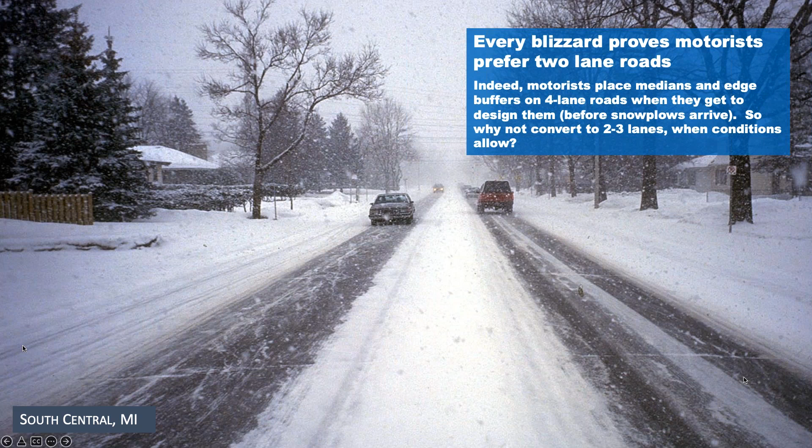I'd like to get right into the presentation. I tend to be a visual person. Whether or not you think you have a road diet, if you have a multi-lane road in the winter, you've got a road diet. It's amazing how gifted motorists are at figuring out they don't want to be close to another motorist coming the opposing direction, and they'd prefer not to be next to the curb or the trees. So they just naturally create a road diet every blizzard. It's something worth thinking about as designers, that motorists have preferences, especially when the weather becomes inclement.

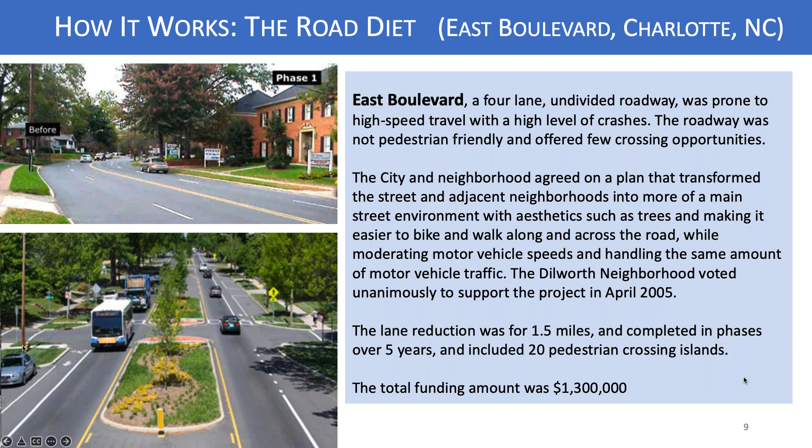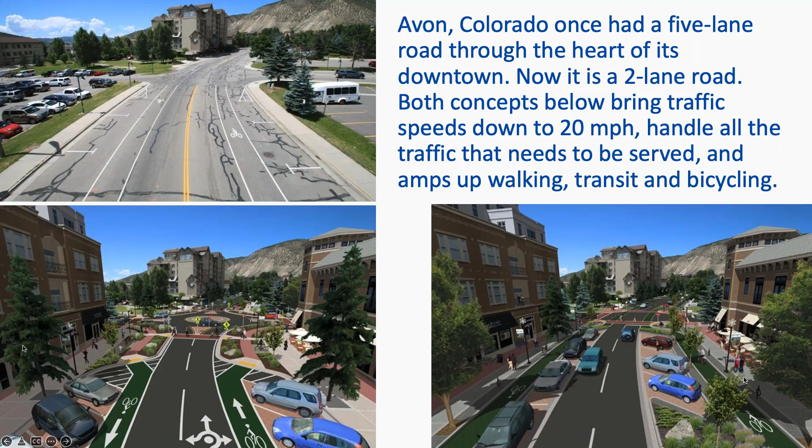I want to use the second name for a road diet in this presentation, which is repurposing a street, to broaden what this presentation is about. It's not just taking out lanes, it's coming up with better overall dimensions for a street to reduce visual ugliness and make it into a beautiful place. Victor Dover and Ken Garcia worked on that project, and it's completed—a beautiful repurposed street. Again, I want to broaden the term road diet for this presentation today.

Another well-studied project is the Edgewater Drive project in Orlando, in a little community called College Park. It was to be a resurfacing project, and the community wanted to do a road diet. The Florida DOT said if you take over the street and it becomes your street, then you can do that—we'll give you permission. There was a lot of discussion about this, but it was very successful and very well studied. We'll show some of the results later in this presentation.

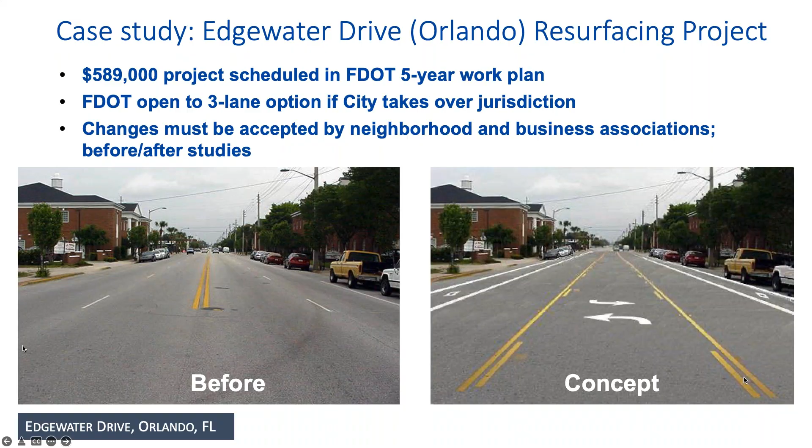This brings us to why road diets. The Federal Highway Administration has this beautiful explanation: the primary benefit is to improve safety, and it's significant how much safety gain there is. We'll get into that in detail. But there are many other benefits, so we're going to cover economic, lifestyle, and multimodal aspects. There are so many reasons now to look at taking what were once fat and unsafe roads and making them safe again. So that's kind of an outline of today's topic.

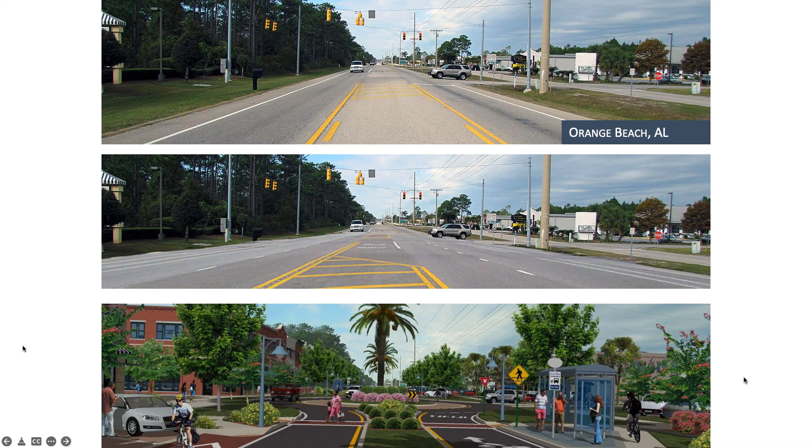And then I said, well, look, you don't have to have this. And so I had my photomorph specialist, Todd Clemens, create a really authentic rendition of what it would be, because roundabouts will carry 30 to 50% more traffic. They could handle the additional load during a hurricane relief.

Lake Oswego is just one of the most dynamic places in Oregon now, as a result of their principal road now being very green. I think it's also important to point out that when we're looking at streets, we should be looking at what is the purpose of the street. What is this node, this entire greater area, what does it want to become? And that should be what drives our decision-making tool.

One of my ultimate favorites for a roundabout, and it's very well known today, we were looking at La Jolla Boulevard, which was 5 lanes, and speeds were excessive. They were way high, but it had a very high traffic number, 22,000 vehicles per day. So we really had to do our math and make sure that it would work. We found out it would with single lane roundabouts, and we'll get into detail.

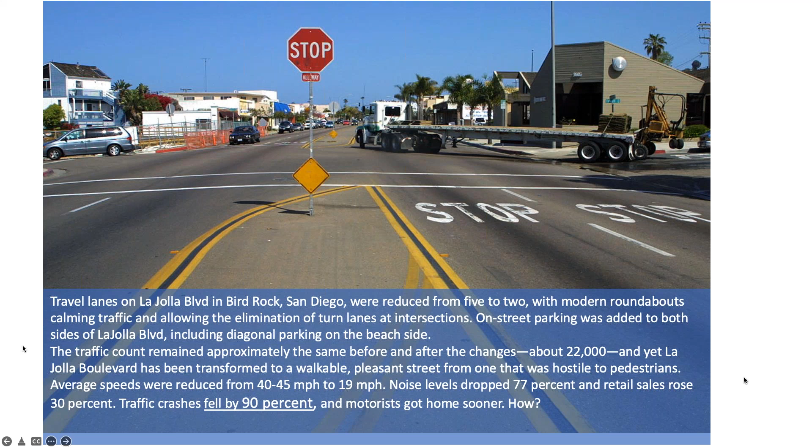So here's the road before. I believe they had 6 or 7 signals and then a couple 4-way stops along the corridor. I'll show you the morph here. In this case, this is an actual, well, it's not a morph, it's the final.

Notice we were able to get angled parking in on one side of the street, so we added more parking and parallel parking. The speeds now are down to 19 miles per hour as opposed to 35 and even up to 45. And here's the cool thing, because we took out all the stops, the motorists are getting home sooner. And so at a much lower, much safer, much more retail friendly and people friendly, this is really working.

Again, a different section of La Jolla Boulevard, you can see what it was and then what it became. Huge number of people now ride this for pleasure as bicyclists. Far more people are now coming down for businesses.

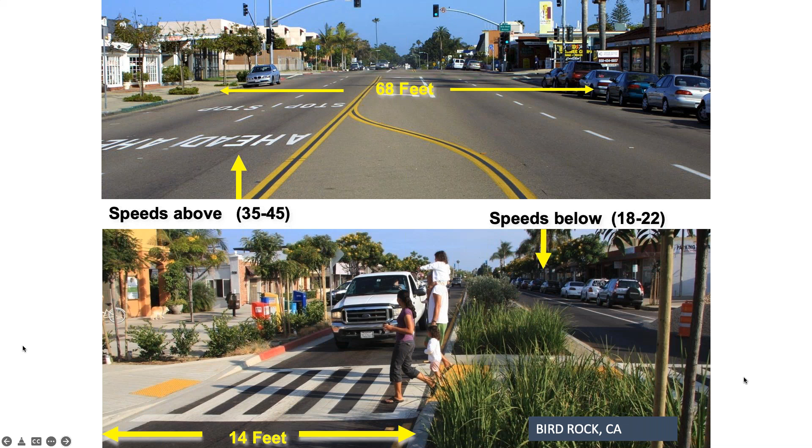You can see the difference in dimensions. It used to be 68 feet curb to curb, now the pedestrian only has to cross 14 feet at a time. The motorists yield because of driving so slow. And so the pedestrians are not slowing down the motors just to get across the street, which they would have had to do with the signal set up, even if there were no motors waiting to get on the street. It was the pedestrians that were calling in the signals that would pause.

And now new businesses are settling in, including some pretty high scale businesses like the Long's Pharmacy. The owner said they would not have come here without the road diet and the roundabout.

So the litmus test I think we should be using when you consider a road diet is: will the change you're going to make add to carrying out the value of your community and reward that short trip and promote active transportation? That's exactly what La Jolla Boulevard did.

Then another one, this one in Albert Lea, a Blue Zone community. Look up Blue Zone in your spare time and see what the organization is all about. But the state of Minnesota did not want to do a road diet, and the community was really together. And they said, no, then just go somewhere else and repave your road. We don't want it to be made the same. Well, in the end, Minnesota said, okay, we'll do it. They did, and there was a 73% reduction in crashes.

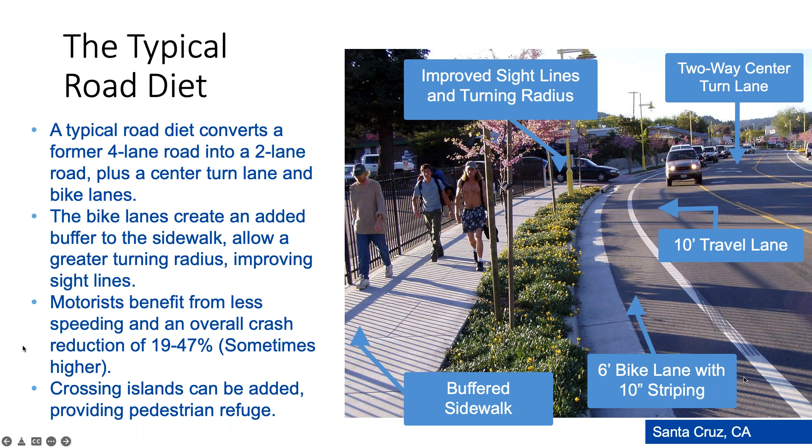So what are the details? When we do a diet, this was formerly 4 lanes. Now notice we've got a wider buffer to the pedestrian, so we're improving walking. We now have an edge with the bike lane, so we've got more turning radius for motorists to get in and out of the street, and improved sight lines. My recommendation is to go down to 10-foot lanes and give yourself more space for the bike lanes or whatever other features you're wishing to add.

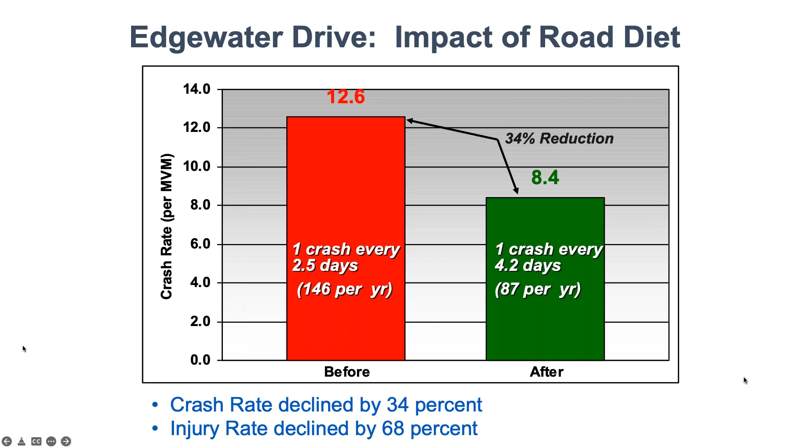So what are the results? This has been very well documented. I mentioned that Edgewater Drive has been very well studied. I'll go through each of these: the crash rate declined 34%, and the injury rate declined 68%. I think we should be looking at our crash reductions, not just the raw number, but how much injuries go down, and record that with your road diet when you create one.

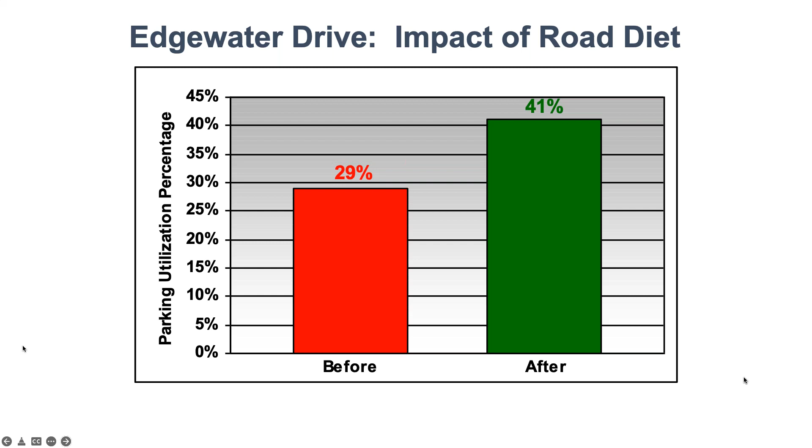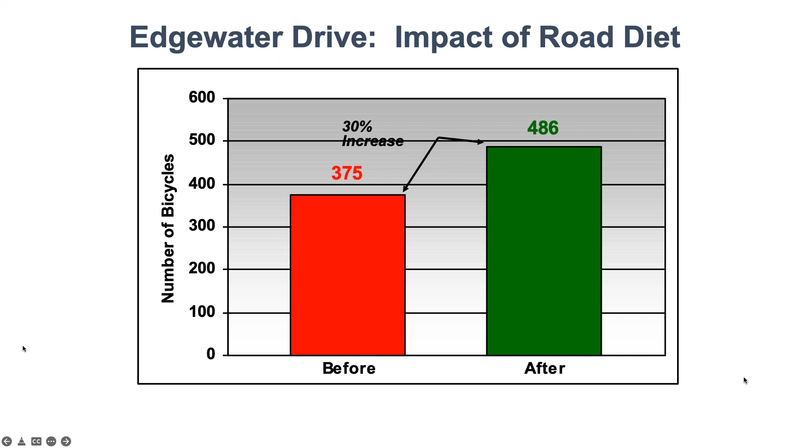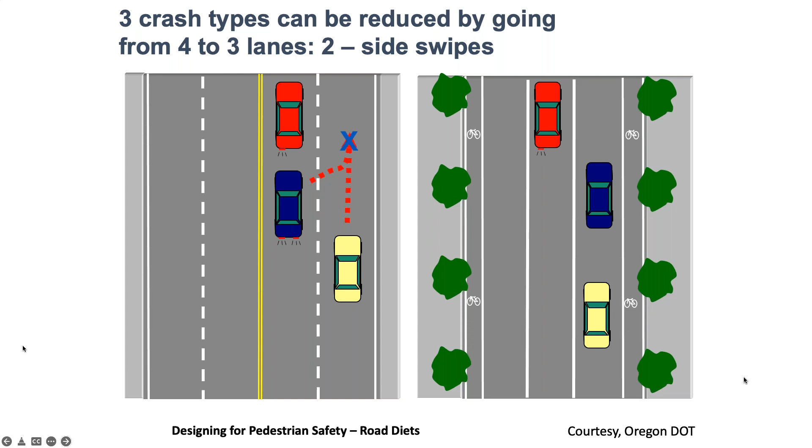Now, why? Well, on a 4-lane road, a motorist who's going to turn left and is slowing down is a high candidate for a rear end crash. In fact, that's the highest number of crashes on a 4-lane. This is what motorists have to do when that occurs—notice the motorist in the blue car is now in conflict with the motorist in the yellow car. Likewise, if the motorist is turning left, the motorist in the red car on the right creates a screen so that the motorist making that left may not see. This is a horrible type of crash, and it cannot occur when you have a road diet.

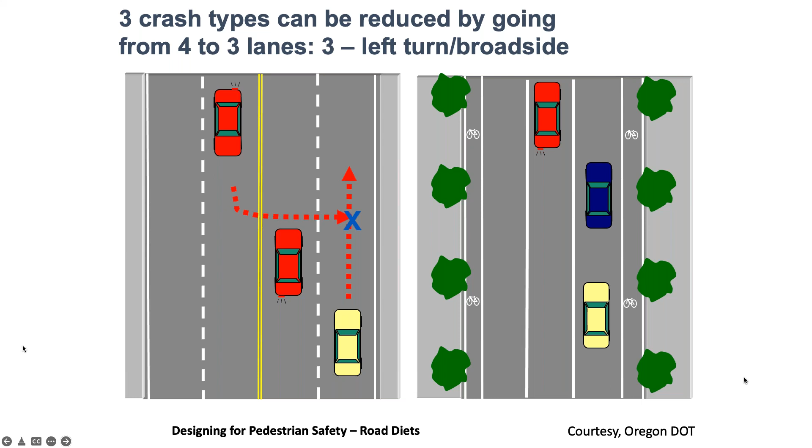Let's talk a little bit about the capacity issue. The interesting thing is Kirkland, Washington, which back then had 3 road diets already in a fairly small town—they realized they had problems with all their driveways with a 4-lane. So when they went to a 3-lane, it opened up the sight lines and gave people places to enter safely. But because they closed down a parallel street for some other construction, it jumped these numbers clear up to 30,000 vehicles per day, and it worked.

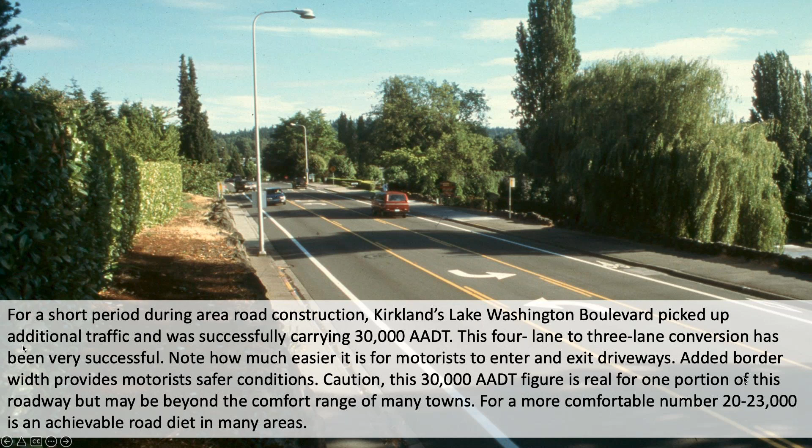So what is the upper range of road diet? With prudence, 20,000 is where we often recommend, but we've proven that you can get up to 23,000, and Kirkland has produced that—in rare cases you could get up to 30,000. They had some dynamics that would allow that to occur, but I want to justify that people are looking at going above 15,000 or whatever. There's a lot of rationale now about how highly competent engineers can do all the modeling and formulas and figure out which ones will work and which ones are going to need to keep all of their lanes.

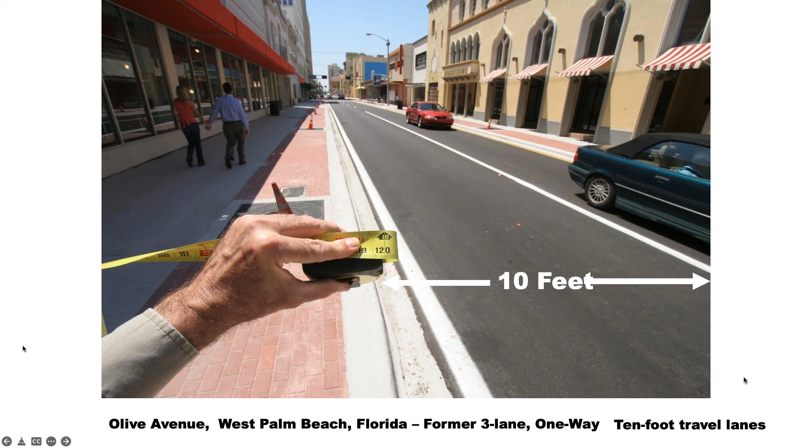I'm going to show the intersection because here you gain another benefit of fewer lanes. At a signal, they used to have 36 feet plus some added radius, so we had to set the pedestrian signal timing for over 40 feet. Now, because they were able to get a tighter radius and drop out a full lane, the signal for the pedestrian can be much shorter, and therefore you can increase capacity per lane with a road diet, especially when you design your intersections correctly.

Economic benefits - this is again one of my favorites. The economics of road diets is really anchored in people waking up today and realizing if we're going to live in communities, let's have them be livable streets that are walkable and retail friendly, with people having more mode choices. So there's so many reasons why today city administrators, planners, and engineers are all saying enough is enough. We don't need big, wide, fat roads that emphasize regional flow. We really need to focus on how we get people to take fewer trips by having real places for them to go to.

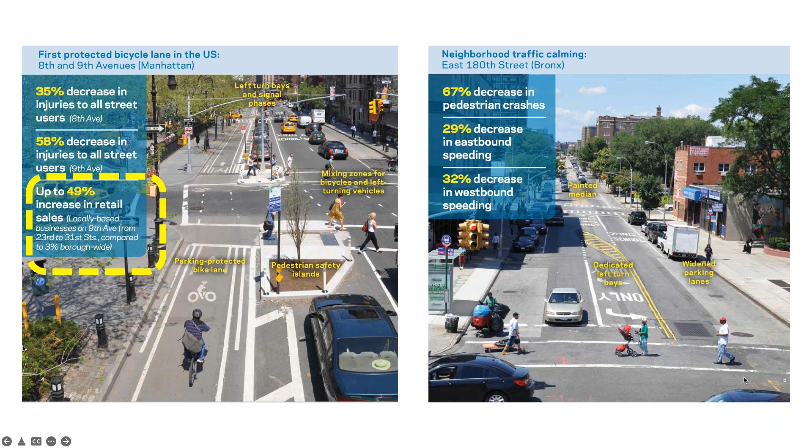Also on the economic effects, New York City has learned that it's the bicyclists and the pedestrians, the people who get out of their cars, who are going to benefit the retail life of their streets. Notice the 49% increase in retail trade after this road diet went in.

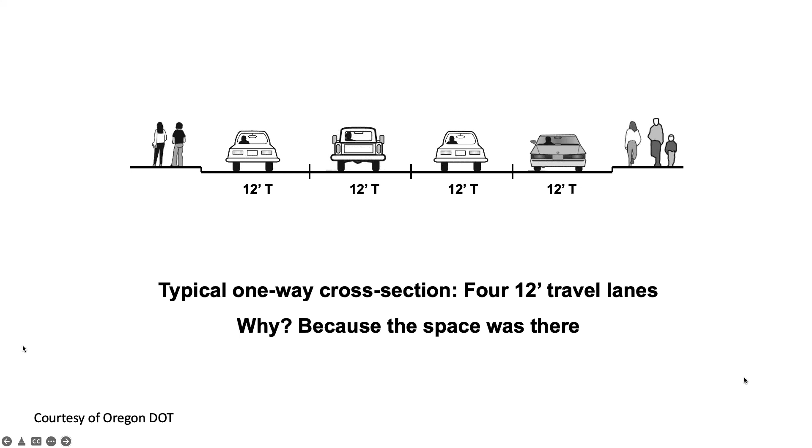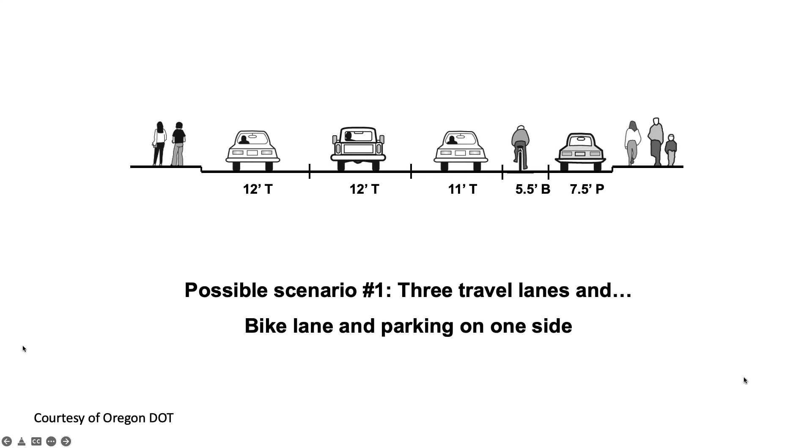Michael Ronkin beautifully laid this out for us before he retired from the Oregon DOT. Notice if you take a standard 4-lane road with 12-foot lanes and drop out a lane, you can add the parking and the bike lane and narrow the lanes and get the parking, or keep the lanes a little wider and now get in the bike lane. This obviously is a one-way street, and then wider systems.

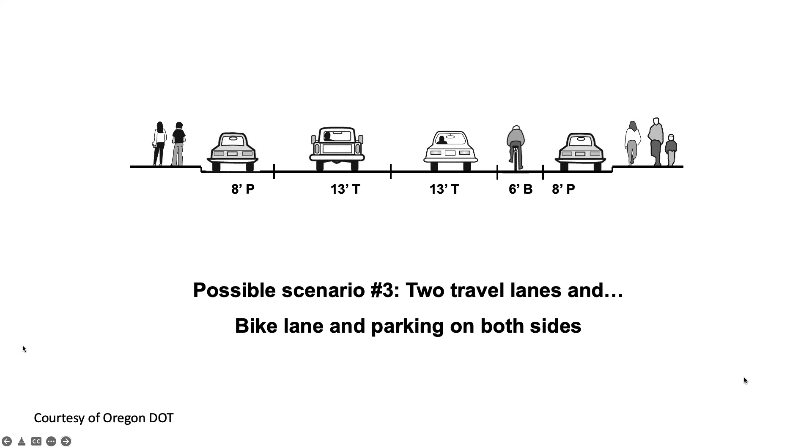Michael has another section where he shows with the road diet how you change the wear pattern of cars and allow the same road to handle more life between maintenance cycles.

Notice these are compact intersections, 10-foot lanes, and don't make anything wider than it needs to be. Keep the signal cycles short and efficient and effective. Before they did the road diet, I wasn't able to pull up a before photo, but before they had 1,800 vehicles per hour per lane, and after the same. At the intersection, they have to add in an additional turning movement in order to keep that efficient.

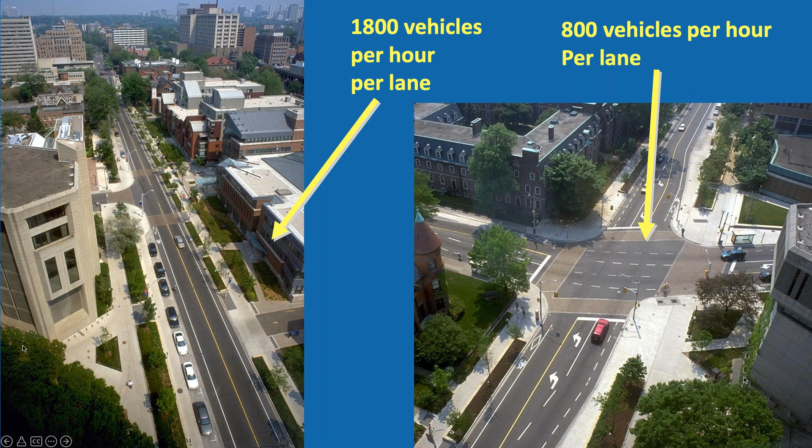So truly everything is about the intersection. A good designer will understand that and allow you to have a road diet where, if it wasn't done correctly, you just couldn't lose lanes. Notice now what they picked up - they've got a beautiful green, wider sidewalks, and bike lanes as a result of the road diet. Again, it's a 4-to-2 conversion, but then they add back that space at key intersections.

Also from the roundabouts presentation we did, just an explanation: when you build an intersection and you're really topping out your numbers, say you get up around 25,000 vehicles a day, you can still do it in 2 lanes, but you've got to widen the intersections. But if you add the roundabout - and again, it's all based on loading factors - you don't have to add lanes, and therefore it becomes very friendly for people to be on foot.

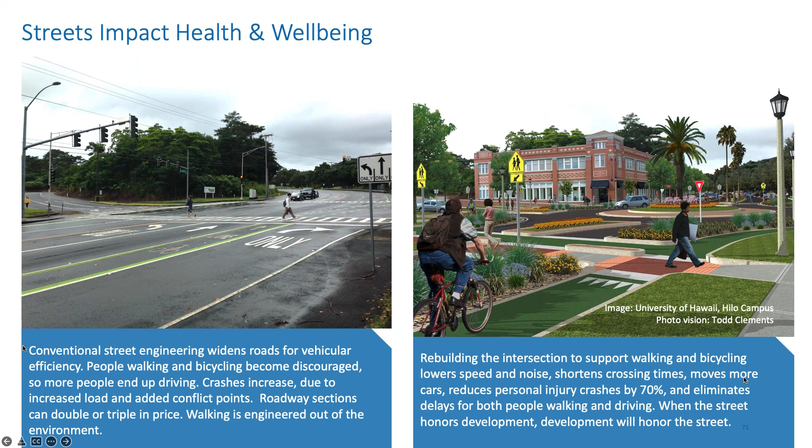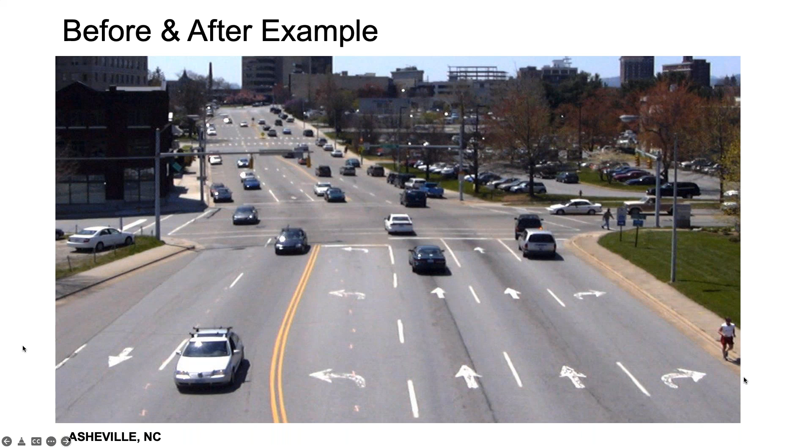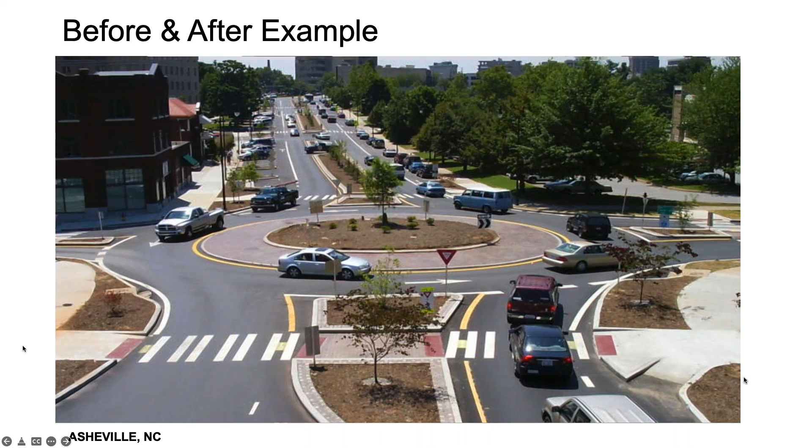Another great design, this one I think was done by Michael Wallwork, one of my favorite engineers. This is the street before, in Asheville, North Carolina. What you see further downstream was essentially a 5-lane road, impossible for a pedestrian to cross. It was rebuilt, and again the roundabout was the key in this case. Notice we were able to take it down to 1 lane in each direction, add in more parking, and slow the speed of the street down.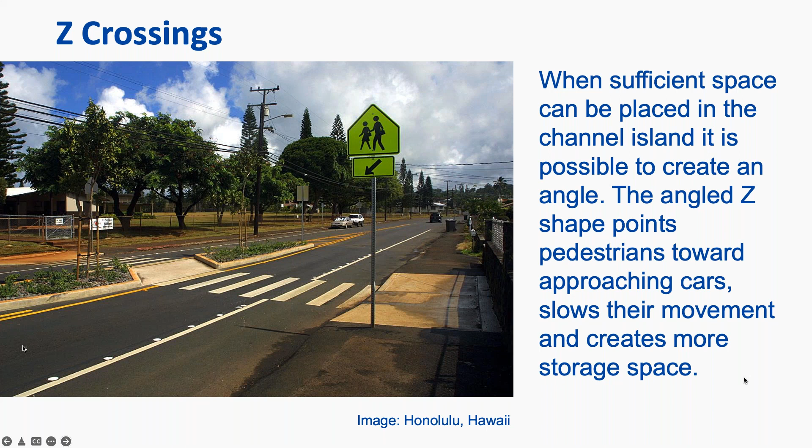So let's now talk about mid-block tools. In Honolulu, again, the ability to drop in crossing islands is a huge benefit for pedestrians when you do a road diet, going from 4 to 3 lanes - you wouldn't be able to do that if you kept 4. But we also like to add in a Z shape - that is, you skew the mid crossing point, which gives you more storage space, slows down the pedestrian from trying to run across, and gives them a purposeful direction to be looking for traffic.

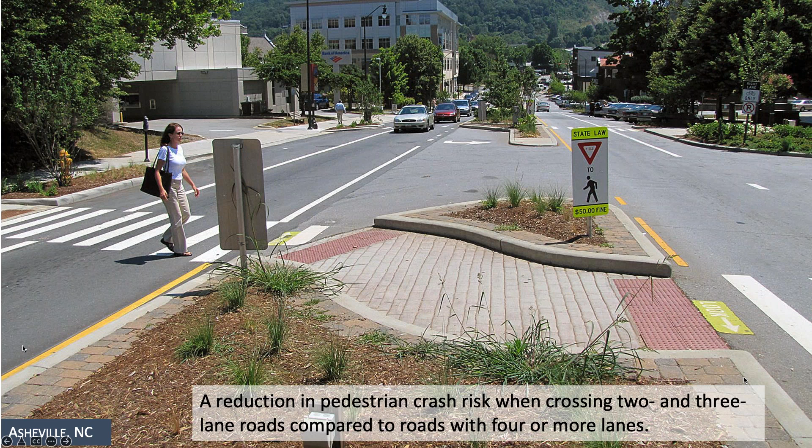In Asheville, this is the actual remade street road diet. Again, that would have been 4 lanes, 5 as you talk about the turning movements. Look how much safer and easier it is for the pedestrian to get across the street.

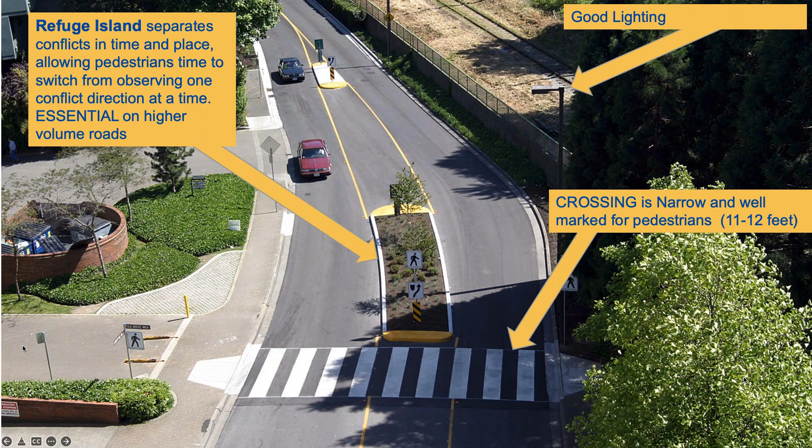Another Z, this one a road diet in Olympia, Washington. Again, some of the details for doing the crossing islands, they were very good about keeping the space open for the driveways. And again, visually slowing the traffic and making it much safer, much easier for the pedestrian to get across the street.

There are a few other applications for road diets I'd like to point out. There's just a huge variety of these. I can only show you some of them. First of all, there are cases where you need to build the 4 lanes.

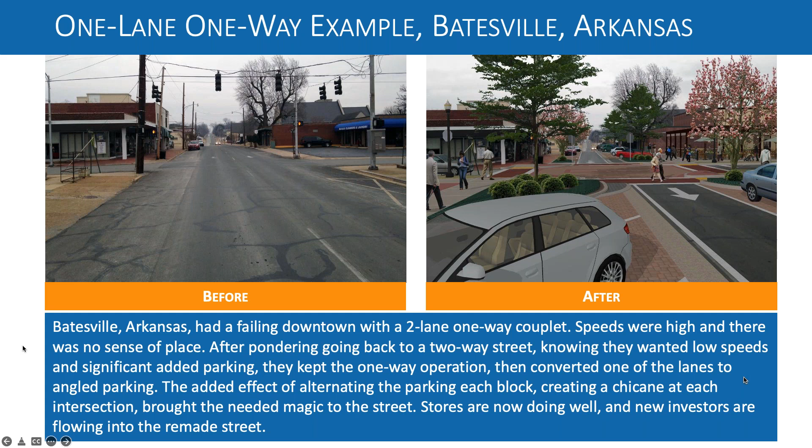But after studying it, we realized there was a good parallel street. Let's skew the street, take it down to a single lane, and then put in the skew at each intersection. They built it, and boy, has it ever helped bring back the business life to Batesville, Arkansas. So different things you can do with 1-way streets.

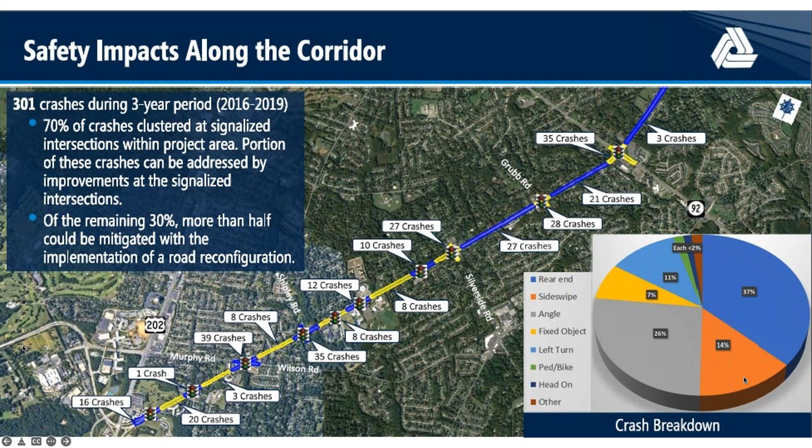There's a huge number of crashes, and even though they point out that the majority of crashes are at intersections, one reason they're higher than they should be is people are going too fast. If you do the diet and bring speeds down to a more appropriate level, there are very likely going to be fewer crashes at intersections where people are crossing.

But here's what we've learned. We did every neighborhood in Clearwater, Florida—only a few road diets, but all traffic calming. By working with the leaders in the neighborhood, we were able to get a 99% approval rate, and I believe that extended out to Cleveland Avenue, which I've just shown you.

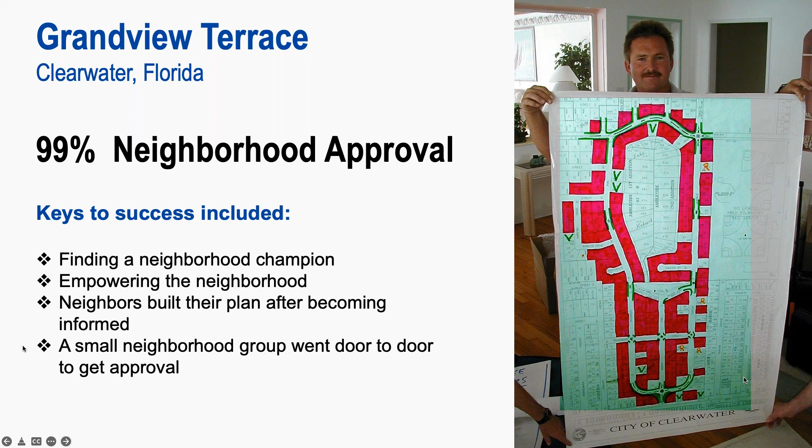An amazing, beautiful story to go with this one. The man you see in the center had a child killed in the street right in front of her house. So she went out, grabbed a can, and walked around the neighborhood collecting several thousand dollars that same afternoon, then went to the city. The city said, well, we'll match that. They did, and then they called me up and asked if we could lower our rates, which we did.

I can't remember how much the whole process was, but for about 10 grand total, they were able to get a Tiger grant and rebuild all the streets in their neighborhood, and one of them was a significant road diet.

Why is it so important to engage the neighborhood and have them become the responsible leaders? First of all, they have more to lose and more to gain if you do something right, so we work to develop ownership in the neighborhood. It's a very effective process which we label informed consent. Once people become informed about the issues with road diets, they're very likely to be strong proponents, as opposed to an outsider making the suggestion. So even a state that owns the road is the outsider—it's always important to get leadership from within the community.

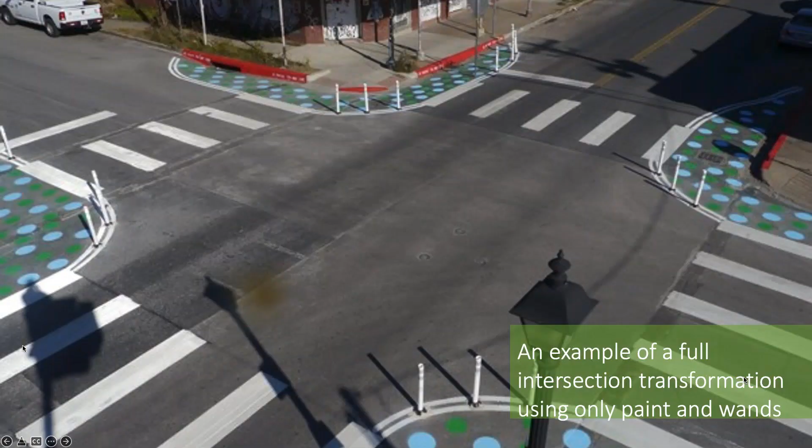Once the public engagement is complete, there are things you can do to prove certain elements work. Michael Lydon, I believe, did a presentation just on tactical urbanism, which you can access through the Maryland Smart Growth Network. Another example is getting intersections more compact or creating public space.

These are all treatments that Seattle's been using very successfully. It says they've done at least 25 road diets, but I believe they're clear up to 30. The most recent volumes they're addressing are up into the 20,000s—one I'm aware of is 23,000, and they may be even a little higher on some others. Again, it's all done through science—you know the outcome before you do it.

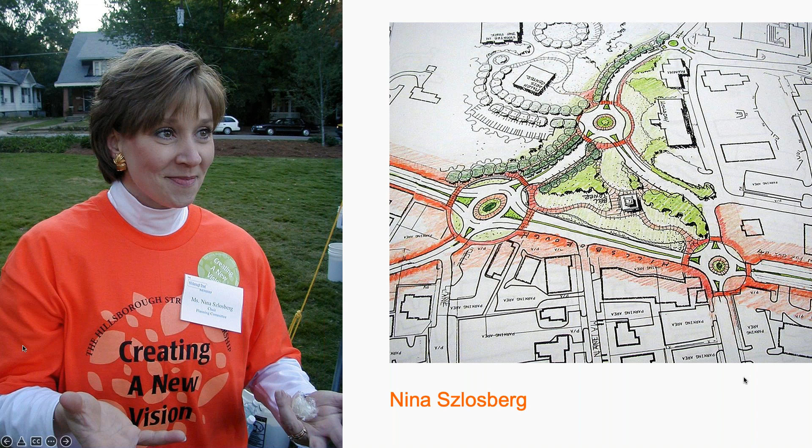And now some of my heroes. Nina Szlosberg realized that her principal street, Hillsborough, was then listed as the most dangerous street in North Carolina. It was the town gown connector. And as a result of her work, you can see it here, the street before and the street after. There's been close to $500 million of new investing to the street. It's now considered one of the safest streets in the state from one of the most dangerous prior to that.

And finally, I just want to close out with a few other leaders, in this particular case, Doug Bryce realized that his county wanted to widen the road from 4 lanes to 6. And he said, do you have the money for that? And they said, yes. He said, good, we're going to go down to 2. He knew his science. The street has to carry 18,000 vehicles per day.